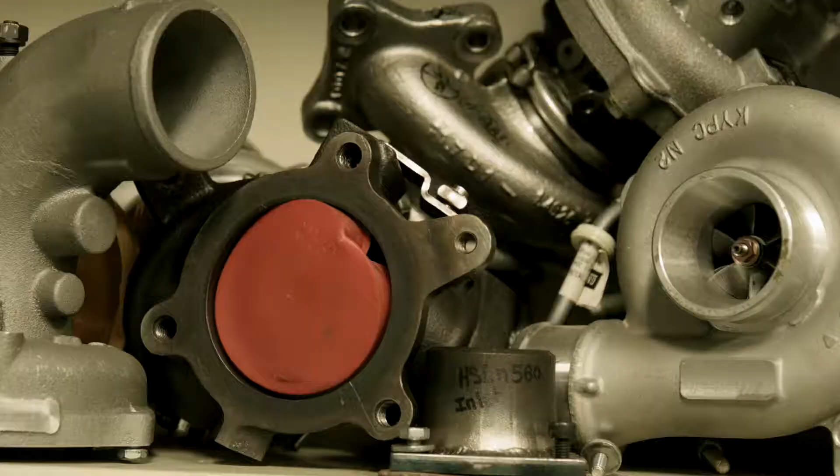Each day in the United States, nearly 600 million gallons of petroleum is consumed by the transportation sector. And a great deal of that fuel energy just leaves the engine through the exhaust system in the form of enthalpy. Turbochargers are an excellent waste heat recovery device which utilize some of that energy to increase the fuel efficiency of the engine by downsizing or reducing the displaced volume.

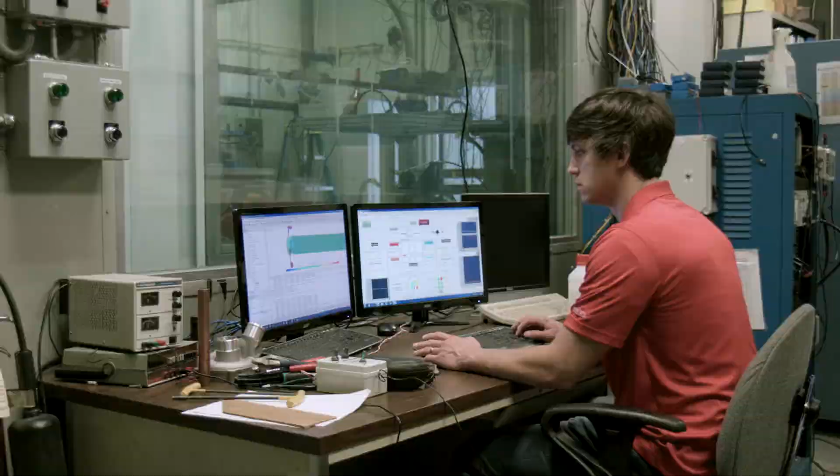In order to understand the relevant physics and improve the designs, most of these research projects will consist of separate experimental and computational components. The computational models that we construct consist of relatively simple, fast-running one-dimensional models to more detailed three-dimensional computational fluid dynamic models, which require extensive resources, and that's what we utilize Ohio Supercomputer Center for.

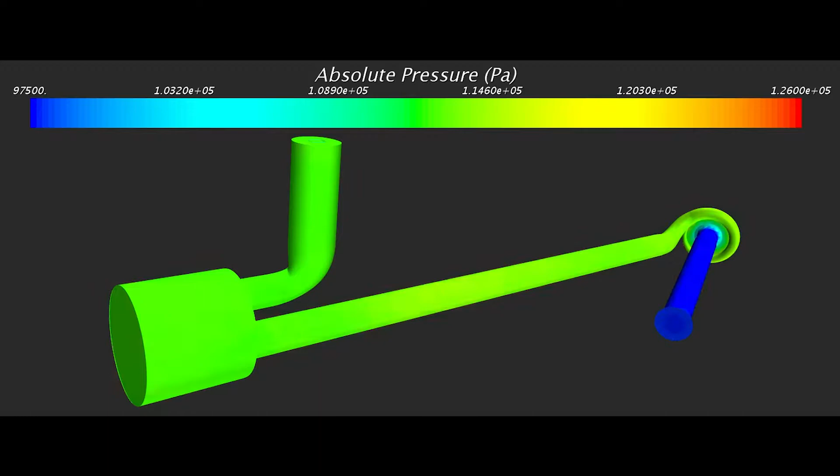This research by Dr. Selamet at the Center for Automotive Research is a great example of how high-performance computing can help improve the daily lives of people around the world. The state of Ohio's investment in the Ohio Supercomputer Center enables corporations to invest in Ohio research as well. The money that comes in to fund these kinds of research efforts at Ohio State and other universities around the state creates jobs and creates the opportunity for research that would not exist otherwise.

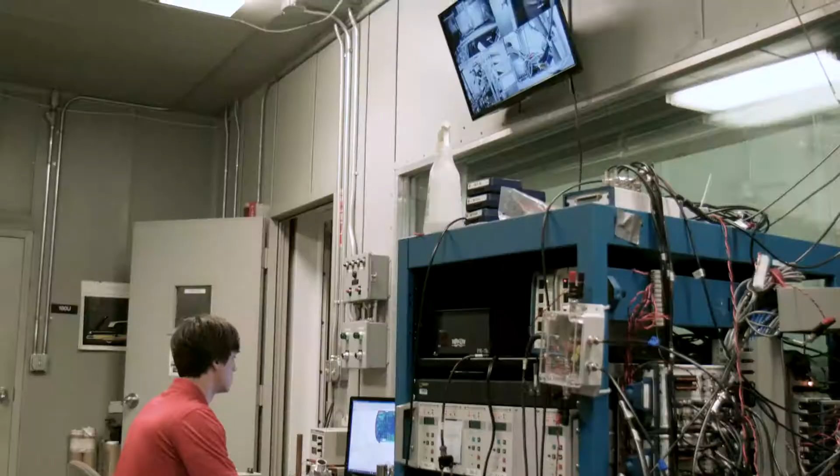When properly utilized, these 3D CFD models can be tremendous tools which help us learn a great deal about the flow field within turbocharger compressors. But when used alone, the computational results can be misleading. That's why we oftentimes bring in the experimental component for validation of the models.

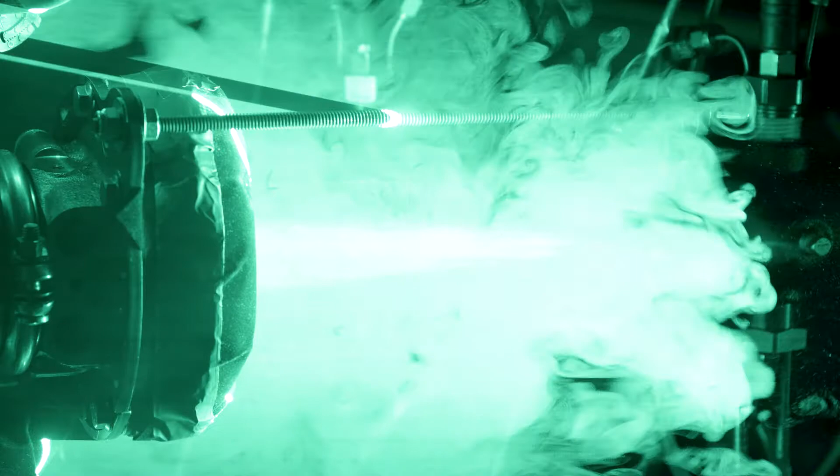The high-performance computing that is available to us through OSC has made it possible to carry out predictions that would have been impossible otherwise. OSC provides an exceptional resource to us, and in combination with the tremendous group of people working there, we've been just overly happy with the support that we've received for our projects.